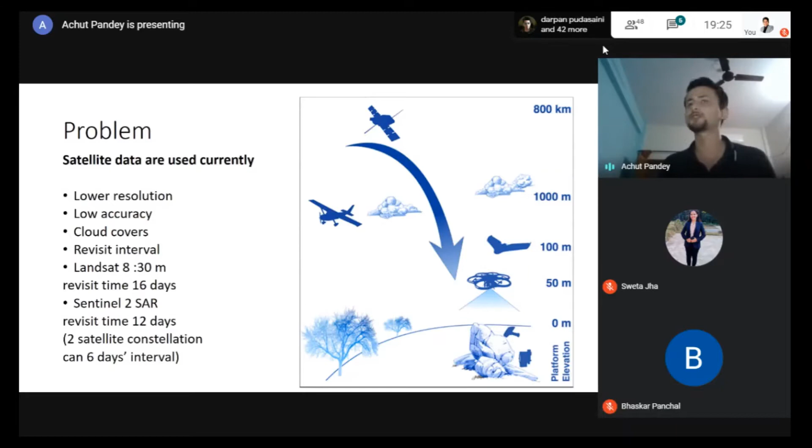The best option we have right now is the use of UAV. We can fly it at an elevation of 50 to 100 meters. There are different kinds of UAVs, different kinds of platforms you can use during a disaster for different purposes, and different kinds of equipment.

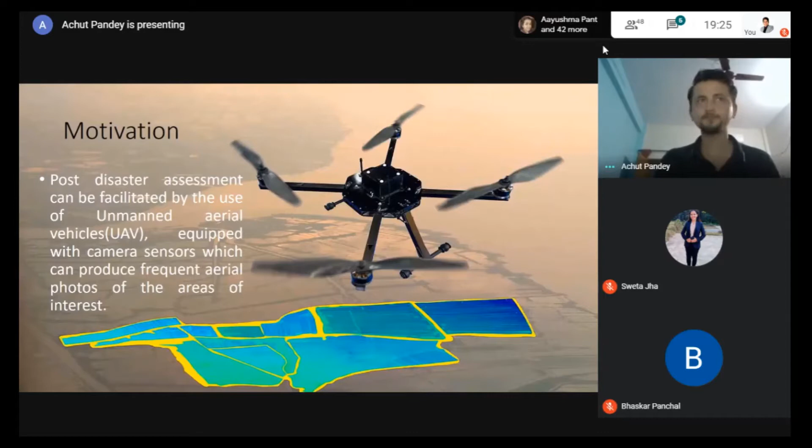So why use UAV then? During a post-disaster assessment, UAV can facilitate faster and timely data capture. UAV is equipped with camera sensors which can produce frequent imagery and photos of the area of interest. What is the advantage of using drone during a post-disaster assessment? That is, we get timely data.

I already talked about the drawbacks of satellite data. We cannot get data at a timely interval, but using drone, you can get timely data. Also, the cost of operation is really low compared to purchasing a high-resolution satellite image, or purchasing or using a helicopter or a plane.

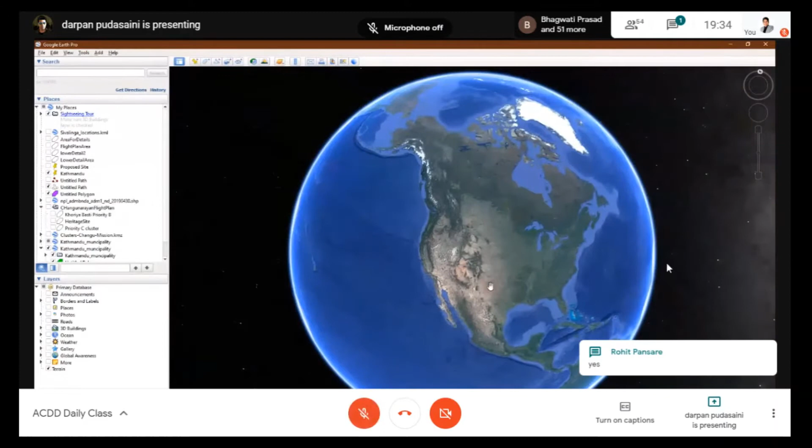Okay, so hi everyone, I'm Darpan. Maybe we'll go into introduction in the next session where I have my presentation. For now, I just wanted to quickly share about how you could download a satellite image from Google Earth itself. Google Earth is a very easy to use tool, but millions of engineers use it, and even though a company owns lots of expensive GIS softwares, Google Earth is the first go-to solution for everyone because you can work on it really fast. And for preliminary mission planning and doing all those things before going to the field, we use Google Earth a lot. So, like Ruchi said, it's really good knowledge to have. I don't want to waste your time, so let's just quickly jump into it.

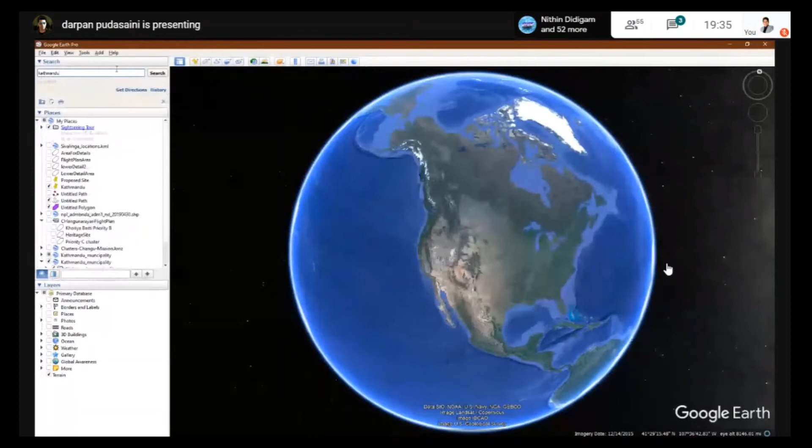So if you have Google Earth installed and you open it, this is the first screen you're going to be shown. What you can do is, if you can see a search box right here, I hope you can see it, you can just type the name of your city. For instance, let me just type Kathmandu because that's where I am right now. If I click and hit enter, it will show me all the possible places relating to Kathmandu. Right now we only have one Kathmandu, that's why it's showing one. But for instance, if you type Delhi, then you might get lots of results, so please be careful which location you are choosing. Then if you double click whatever shows on this list, it will automatically zoom into that place. Now you can see the satellite image of Kathmandu here. Let me just turn off these layers.

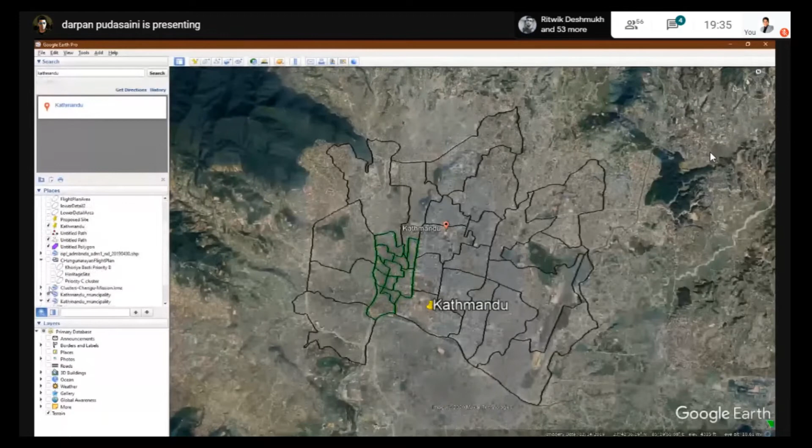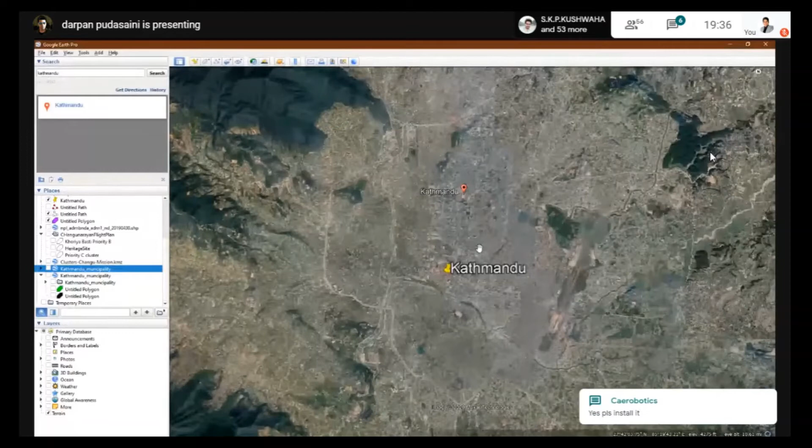Okay, so this is the aerial map of Kathmandu. Depending on my purpose, what kind of data I use might be different. I might need a satellite map so that I can present the whole Kathmandu Valley that's going to be designed upon. For that purpose, I'll just adjust my zoom accordingly.

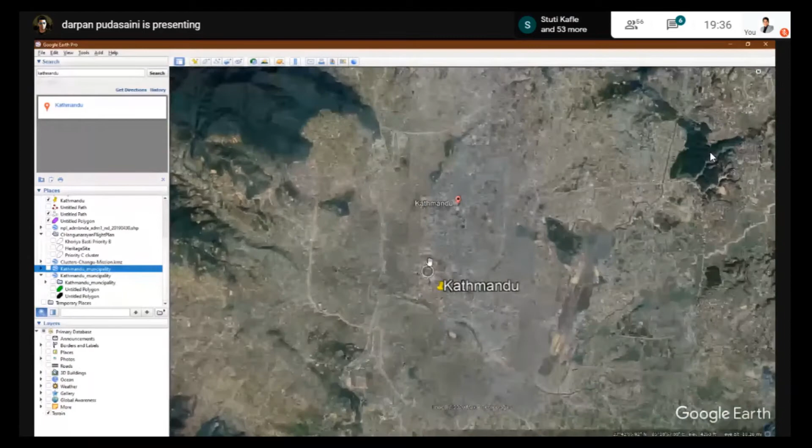So right now, we're like several hundred meters, like 700 feet up in the air. But if I just zoom in, it's really easy. You can use your mouse to scroll in and scroll out for zoom in and zoom out.

So for instance, let's say that I need a satellite image of this particular football field that we can see. Even I don't exactly know... oh okay, this is called Dasharath Rangasala of Kathmandu, I think.

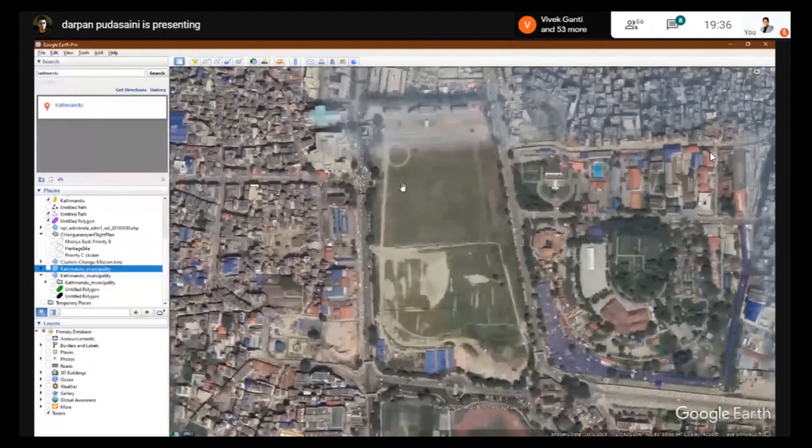So the trick is, for instance, suppose that I need the map of this area. What I do is I just zoom it to the level up to which I require the map to be zoomed down to later.

And then what I can do is, I hope you can see these really small icons as toolbars. We don't have much time to go through all this, but the third last option there says save image.

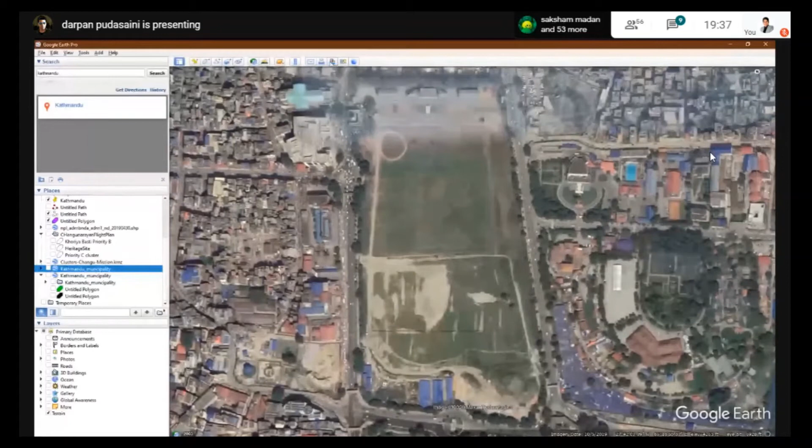So it's really simple. You just adjust your display for the location and for appropriate zoom levels that you want to save the image. And then you just hit this third last icon that says save image.

So when you hit it, you'll be given a few options like this untitled map here. This is the place where you can enter a map name. So when I just click there, I can write map of KTM.

And then you can see legend over here. So if you have lots of places or landmarks here, you can just show them all in legend. But for now, we don't want that.

So what you can do is change the resolution of the image that you want. For instance, I want a full HD image. And then I just hit save image, give it a name, map of Kathmandu.

So it will take some time to save the image.

I'm not sure if you can see the window here, because Google Meet is sharing just the Google Earth image, but the image is already saved on my desktop. Let me just show it to you.

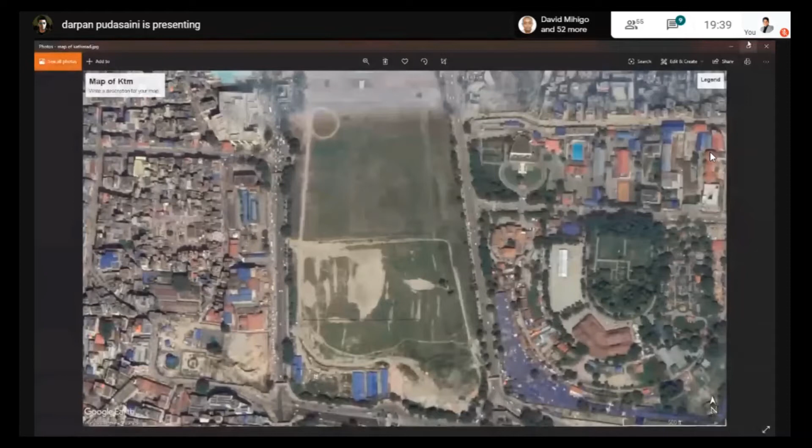Okay, so this is the photo of Kathmandu that I just saved from Google Earth. Now I can use this photo for my projects or whatever I want. So it's as simple as that.

But there's one thing we need to consider: the image that I just saved from Google Earth, it's just an image. We don't have the information of GPS coordinates. So we call it a non-geolocated image, per se.

Like if we click photos from our smartphones nowadays, the smartphones are able to geotag our photos. So what that means is if I click the photo at some random location, the phone will also save the GPS coordinates of the location along with the image so that I can retrieve it later.

The image that we just saved using Google Earth is not geolocated. So you can use it as a base layer image as long as you are okay with adjusting it. There are a few other more complicated tools that we can use to get geolocated images, but I think for the question that was raised earlier, this much is enough for now.

Okay, so thank you, everyone. It's really great to be a part of this enthusiastic crowd. Thank you so much, Ruchi, and everyone once again. I'm just trying to connect my presentation, and meanwhile I wanted to say some things. In my presentation, I had included a few aspects already presented in Mr. Achut's slides, so I quickly removed them, but I'll go through them. If anyone has confusions on those things, or even from this presentation, please feel free to ask, because we can go over those questions as well.

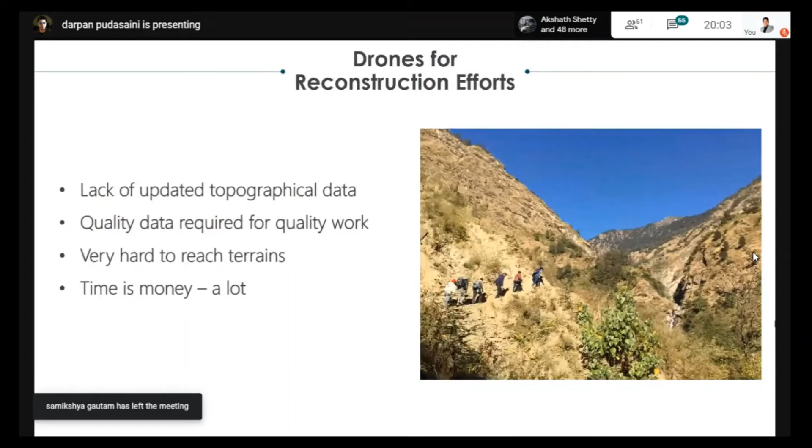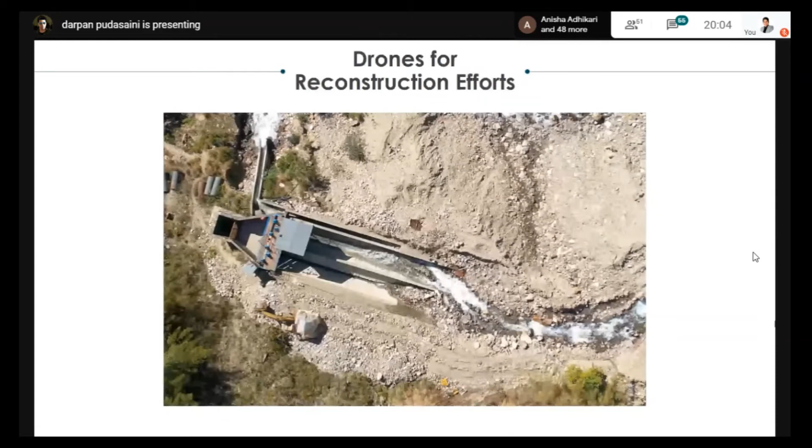I'll go through this story. There's a hydropower called Bhairabhkunda, a small one, almost 3 megawatts, situated in Sindhupalchok district in a location called Tatopani. In the unfortunate earthquake that struck throughout Nepal in 2015, this hydropower sustained severe damages.

It was already up and running and generating revenue, but due to the earthquake there were landslides in the area and huge boulders came onto the powerhouse, the diversion weir, the settling basin—everything was damaged. This is a photo of us on our way to the hydropower. After the earthquake, this hydropower had to shut down operations because of the damages.

Since the earthquake kept coming in multiple waves, nobody was willing to go to the site to take assessment data—to assess the damages, take measurements, and make plans based on field data. It was really impossible to resume operations because no one was willing to go back there, as Sindhupalchok was one of the hardest hit areas from the earthquake.

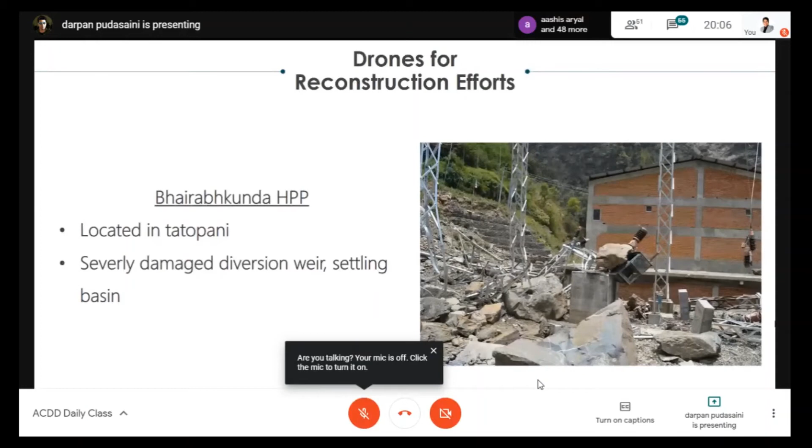I'll go through the different types of data produced. One of the prominent ones is the orthophoto map. Whenever you take drones and photograph an area, you only get a frame, a picture of a small area. But when you take thousands of overlapping pictures of that area, you can use software to combine all those photos into a single map, identical to satellite maps but much higher in quality. These are called orthophoto maps. Ortho means orthogonal, or taken from a 90 degree straight viewpoint, and it's a photo, so it's called an orthophoto map.

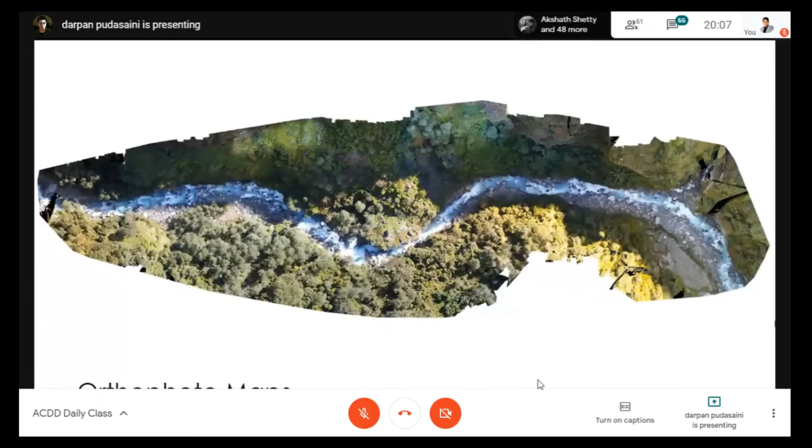It's also regarded as an orthomosaic because it's a mosaic of lots of images. So whenever you hear orthophoto or orthomosaic, it refers to these bird's eye view images of a specific area.

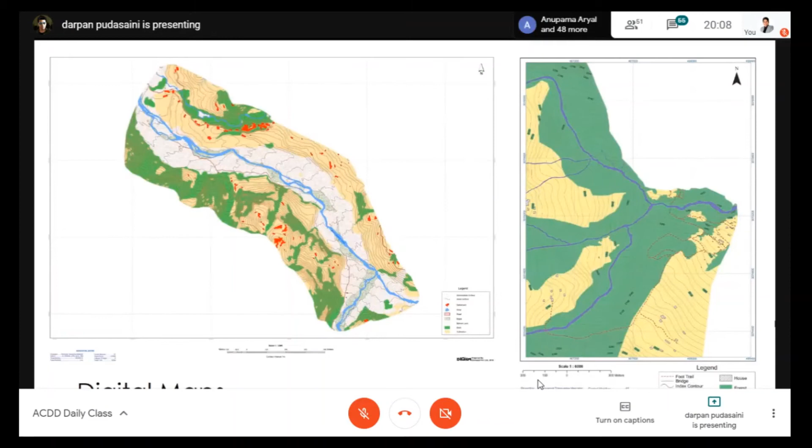Then there are digital maps. Using those orthophoto maps, GIS engineers, and specifically cartographers who are the experts in making maps, are able to create high resolution digital maps like the ones you see on screen. These maps are used by engineers and are also usually found in printed forms.

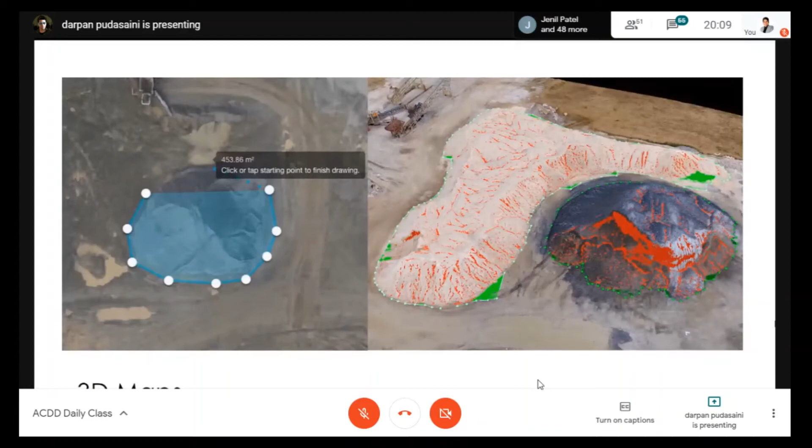Then we also have 3D maps. To give context, it's like playing a 3D game where the environment feels really immersive - we don't just see a 2D image but a 3D image of the area. Drones are able to replicate realistic 3D maps so people can measure lots of things. For instance, this 3D map I downloaded from the internet shows a pile of sand over a project site. This allows engineers to directly calculate the volume of the sand from it. So it's one dimension higher than 2D maps. This is just one of the features, but it has lots of other uses as well.

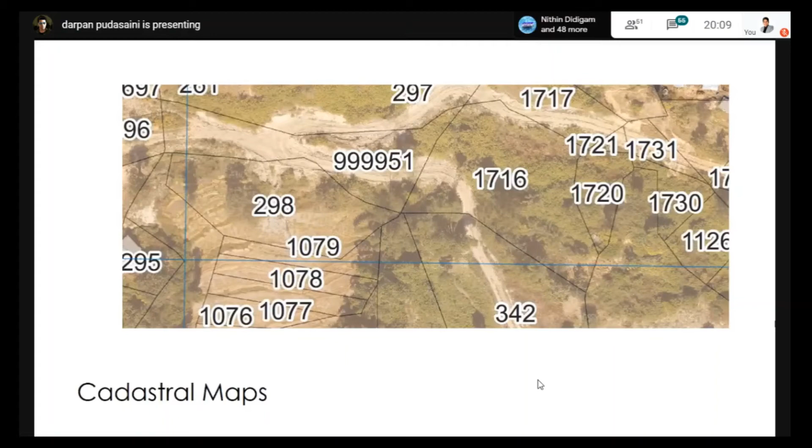Then we have cadastral maps, which are digital cadastral records - land parcels or information about land owners. We can get digitized cadastral information and overlay it on the orthophoto maps or digital maps we produced, making it easier to see or divide the land based on ownership. We'll go into more depth on all these maps later in other topics.

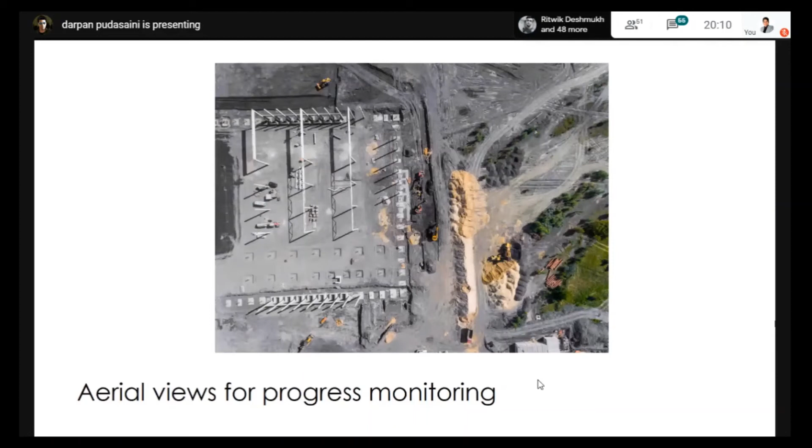Simply photos and videos are also really important outputs from a drone, because just by viewing them we can get an exact estimation of the area and know the ground situation and reality of the area. So for lots of project progress monitoring purposes, drones are used and just the pictures are enough. These were all the different kinds of data we provided to the hydropower survey for them to work upon. There's one extra thing I wanted to add.

It's called as-built analysis. Engineers build maps and designs all the time, but it's really hard to compare, after any construction work is done, whether the design specifications were actually met or not.

What as-built analysis allows is you just do drone surveys and take 2D and 3D maps, and then you can overlay those previously built designs to see whether the design specifications that the engineers or experts had planned on are actually reflected on the construction work or not.

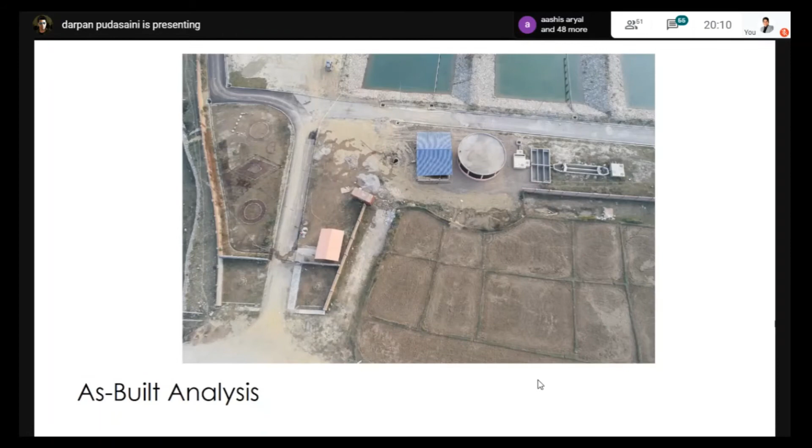So these are basically the most popular data products and utilities that are used as outputs from drone images or drone surveys. And then there's also this, which is an icing on the cake.

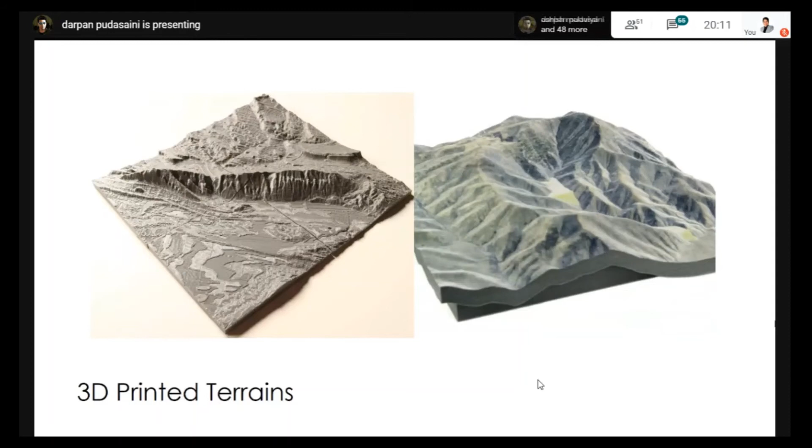We have seen lots of 3D printed monuments all around, right? So it's really being helpful for lots of organizations. For instance, some organization is studying glaciers, so what it can do is use the 3D map generated from drone and use 3D printing to print a smaller scale version of the 3D terrain maps. So it helps a lot in planning, and it's also a great masterpiece for showcasing and everything.

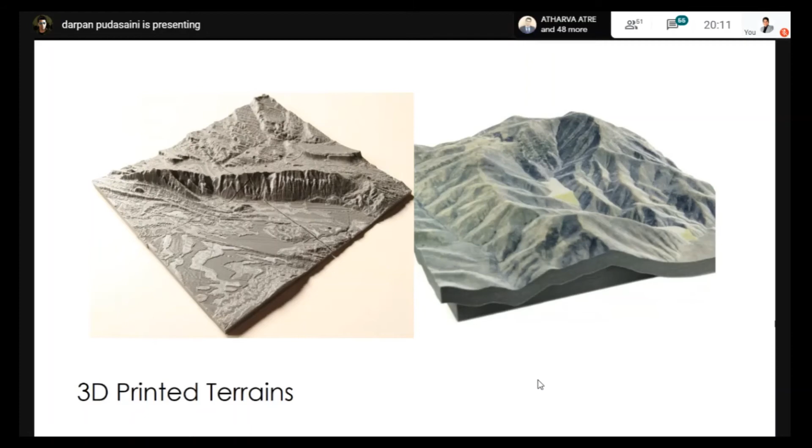So these are basically the types of data products that we can use. After the second use case, it will all be pieced together, and we'll take away the key things from these projects, and we'll also see how drones are useful in rebuilding and reconstruction. So let me come to the second use case, which is drones for community rebuilding.

Let's go to the ground problem first. The thing is we have a lack of updated topographical data, and even the data that's available is not of adequate quality. Especially in post-disaster scenarios, the planning is really crucial. It needs to be really quick, but we also need as high quality as possible so that we don't have to always go back to the field to measure something. So it's really crucial to have data quickly and then be able to act on it quickly.

Also, we've been building communities for ages, but the problem is the experts, engineers, architects, and GIS experts are the ones who make the plans in their own offices, in their headquarters. And the people who are laymen living in the community have no idea what the layout of the community is going to be, whether it's acceptable to them or not, conforming to their culture, conforming to the way they are living. So it's really crucial for the community and other stakeholders, including donors and NGOs working in the area, to be engaged in the project of community rebuilding.

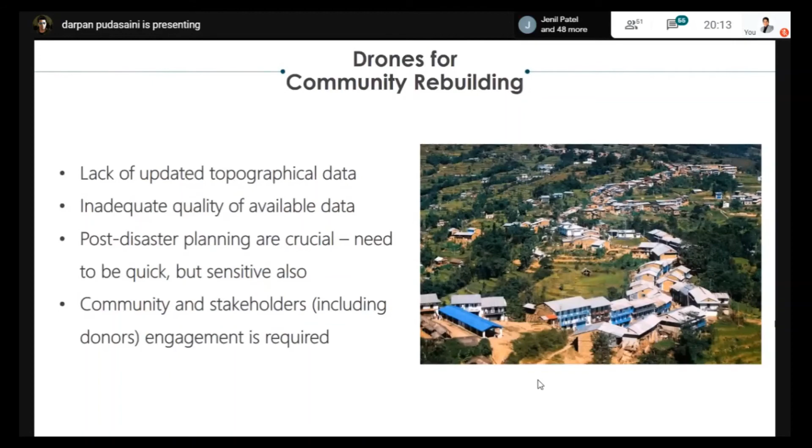So these have really been hard until now, because the maps that we see are really technical maps that only technical people can operate on and understand. So it's really hard for people to collaborate together. So these are the problems.

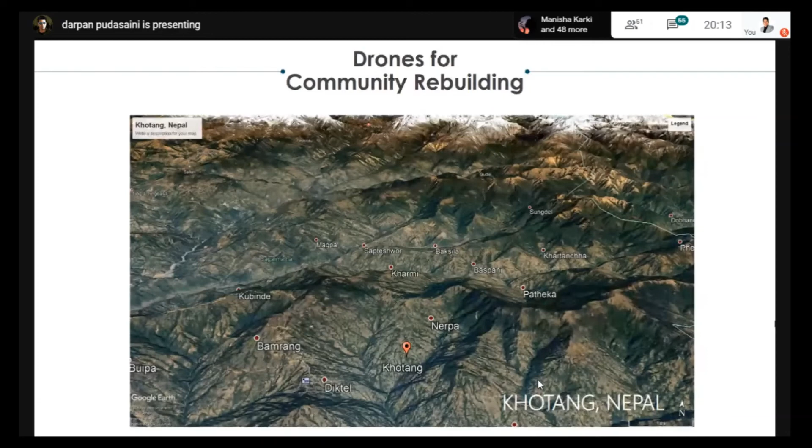So going into the story, there's this place called Khotang. It's a really hilly place nearby Sagarmatha. Even I haven't been there myself physically, but I've seen lots of images and videos from there. And from what I've heard, it's really tough to go there.

Immediately after the 2015 earthquake, there were lots of communities that were displaced from their homes, because the whole community was either affected by the earthquake itself, damaging the buildings, or there were landslides induced by the earthquake that swept communities and villages at once. Hundreds of thousands of people were out of their houses, forced to live in makeshift shelters back then.

And from this Khotang community, there's this place called Vijay Kharka. There's a village of around 20 houses which was severely damaged by the earthquake, and they had to quickly move those people out. But the weather was also bad, it was constantly raining, and those people were forced to live in plastic shelters. So it was really a tough challenge for even the local government to choose a new place for relocating them, because minor waves were always coming and going, and there were vast hills.

So it's really time consuming and costly for the government to send in surveyors and expert teams to survey different hills to find a suitable place. It's also a challenge to take high quality data of that area and use it to make master plans for the new community and then actually construct it. This is a process that usually takes over 1 or 2 years, from our experience in the context of Nepal. So this was a huge challenge.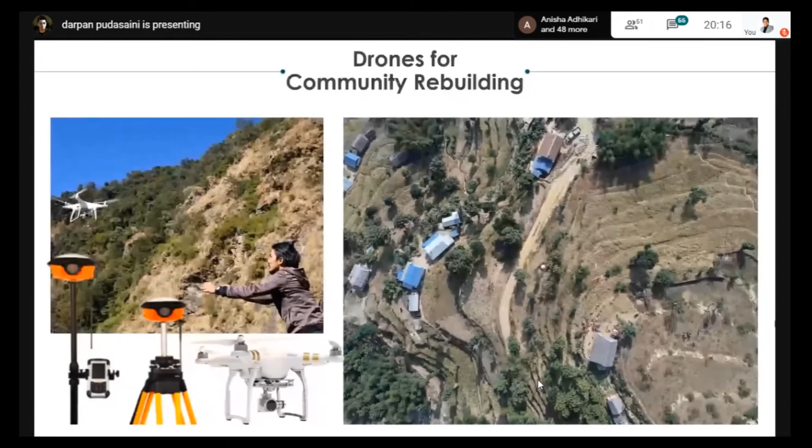We were able to quickly create master plans that we shared with the community people, and they were using large flex printed maps, pinning with thumb pins, planning out where they needed houses and schools. The villagers there were the real planners; our designers and engineers back in our office were only implementing their vision, because the people who were going to live there were actually the designers in this case. This was the first use case in Nepal that happened like this.

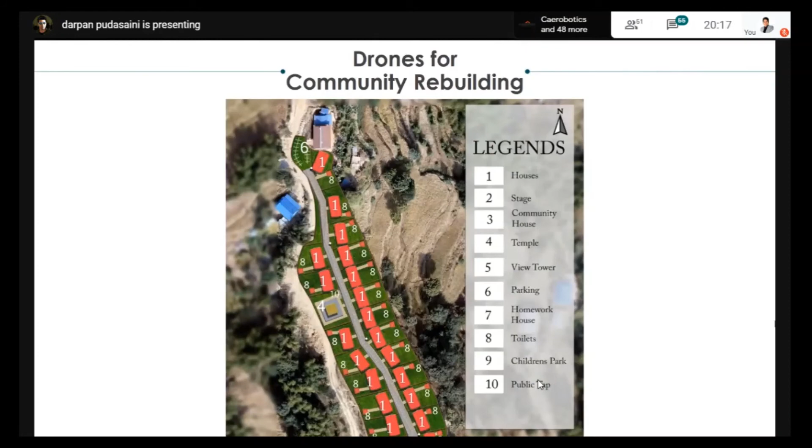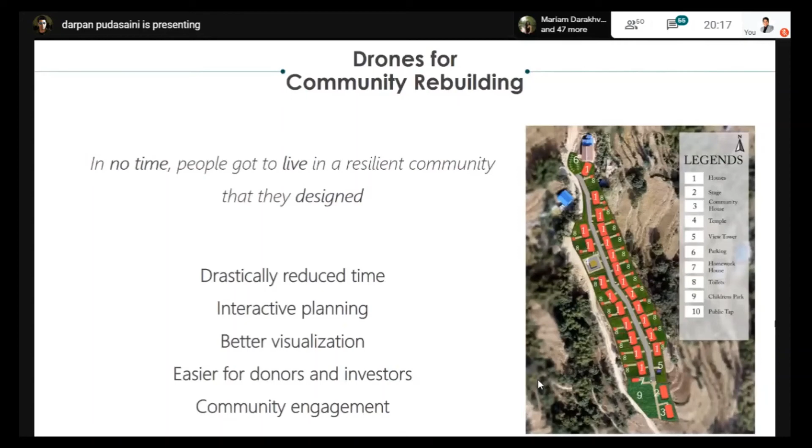So this is the second story, and the moral of it is that in no time, people got to live in a resilient community that they designed. Let's emphasize the word 'no time,' because it was 4 or 5 times lesser time than would otherwise be required with traditional means. The people got to live in a resilient community, and we say resilient because this new place was selected by experts as more resistant to further damage. The community had been participating in the design itself, so they had ownership of the place.

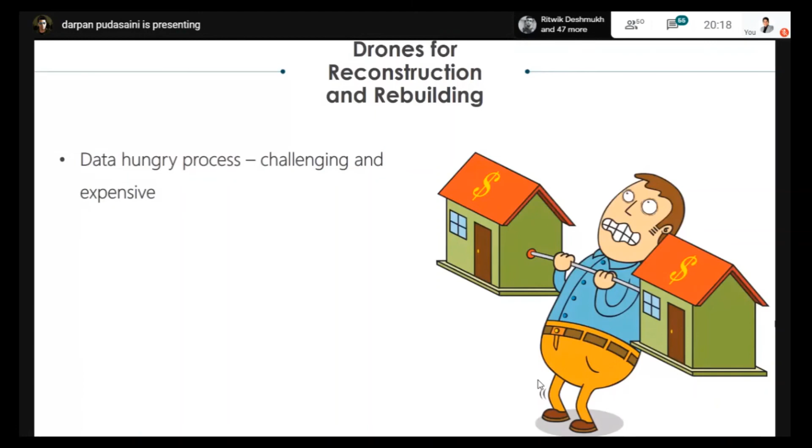So what do we learn from these stories or use cases? The first thing is it's a data hungry process, because rebuilding and reconstruction mostly happen immediately after or during a disaster, when government and agencies' attention is divided, making it tough to manage. Going into rebuilding and reconstruction is sensitive, challenging, and expensive, and also time sensitive, because we have to be agile. If it took 1.5 years just to come up with a master plan and create a new village, the villagers, whole families, would have to live in plastic shelters for 1.5 years. So we have to come up with quickly implementable solutions.

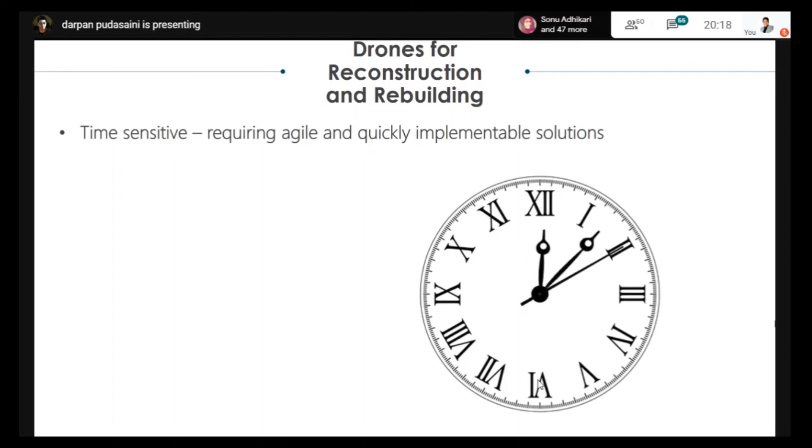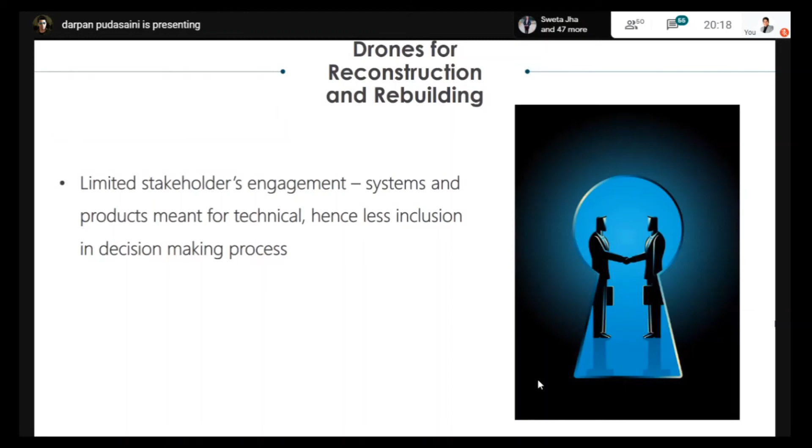Also, there used to be limited stakeholder engagement beforehand, with less inclusion of the people, the community, and the different human rights people working in the area. They couldn't participate because this process of planning and reconstruction is really technical.

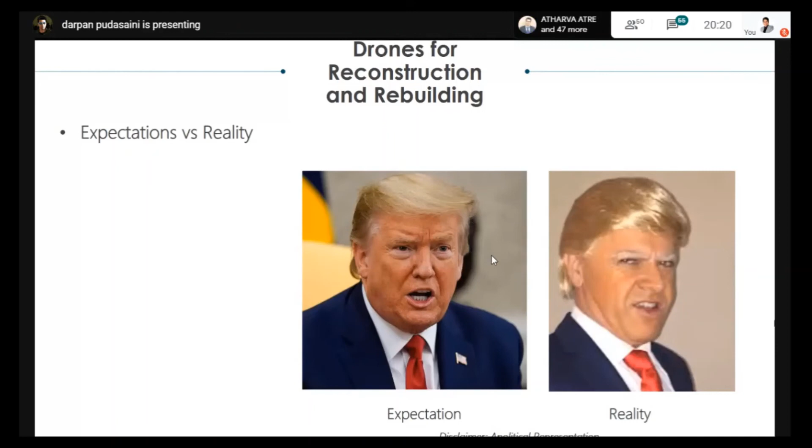The main problem is that the designs and the whole process are not based around the actual, accurate data, and they don't include the community itself. And also there's this redundancy of tasks.

In traditional surveying methods, if you want to design or rebuild a village, you send a set of surveyors who take land measurements, and houses are laid out. Then for the sewerage lines, another team of surveyors goes back to take measurements for roads and sewerage lines. Then a third time, a different set of surveyors go to the field to take measurements for electricity wires and telephone wires.

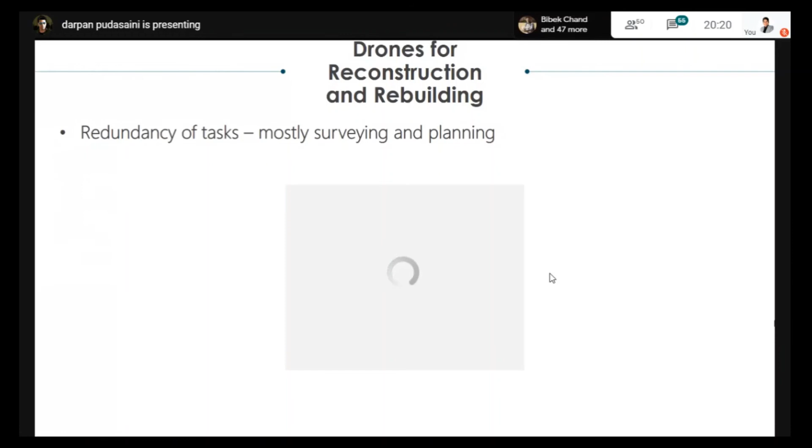This keeps on happening. It's really redundant, and really expensive in terms of time as well as cost. These traditional projects that did not include drone surveying were really redundant in terms of task and project management.

But these problems are solved using drones. I don't want to give the wrong impression that drones are the savior here, or that they're here to replace any technology. Just like we learned in previous sessions, we have different means of surveying—ground tools like total stations and theodolites, measurements from planes and helicopters, and satellites. Drones are also one of the systems that add to this ecosystem. It's not replacing everything else, but creating a unique place in the surveying and mapping market.

So I think that's pretty much it. I hope I didn't leave out any important topics.

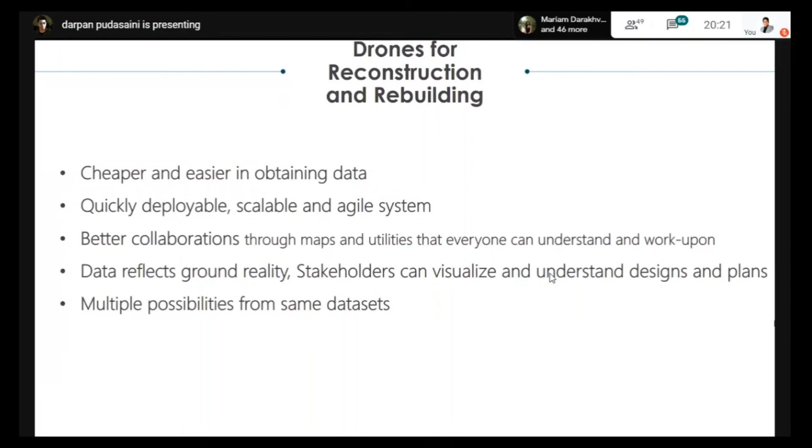Moving on to the challenges, while there are dozens of challenges, I just wanted to quickly go through three, because over this 30-day period with other presentations as well, we'll come up with lots of solutions and challenges, and you might have assignments to find challenges in your area. That's why I didn't want to spoil the moment. So I just included three key things that are huge challenges, at least for the market we're seeing right now.

The first is legal, because governments are still reluctant to completely open the way to newer innovations that use drones for solving grassroots problems.

The second is technological, because in Nepal, India, and lots of countries, we are still dominated by China or a few other countries who produce drones, software technologies, and parts. So we need more interest and investment towards innovating and advancing this drone technology.

The third challenge is sustainability related, because we think that whenever we do a project, the problems are automatically solved. But the same process or project has to be replicable and sustainable. Building local capacity and enabling people in their own area to use the latest technology to solve their own problems, and go into entrepreneurship, is really the way forward.